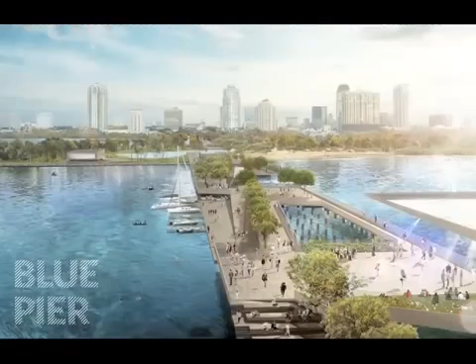It's really all about how do we craft a new relationship between your city and the bay that you sit on. Blue Pier is really a weaving together of the city and the bay, bringing it closer to the city, bringing all those experiences right into your downtown. And we think we came to this idea from building on your legacy, how we've learned from your own history, your values and what's important to you.

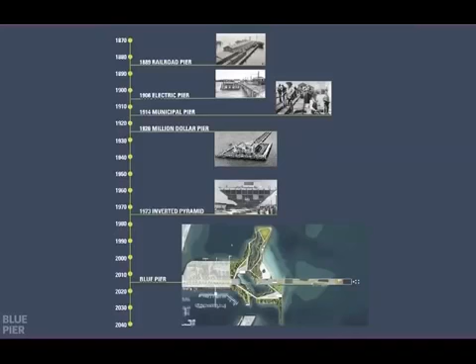We started looking at all the piers, because we were doing the pier project, and found that actually there's been a lot of piers. They've changed over time, even changed location, changed use - they've had railroads, boats, then became pleasure-oriented. The $1 Million Pier, the Inverted Pyramid - it's interesting how they've renewed each other over time, until we are where we are today, again thinking about renewing the pier.

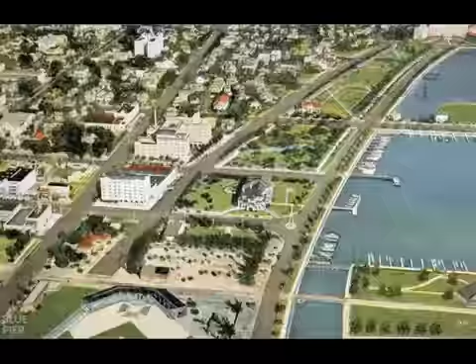On the other hand, in looking at your history, we found something really profound that has guided your development as a city for over 100 years, and it hasn't changed - this is the legacy of your Emerald Necklace, your parks. People around the world know that you did this, that you made that critical choice early in the 1900s that so affected how your city developed. So it's in the spirit of this kind of civic landscape that we've approached the new Blue Pier project.

We've also looked at some of your iconic images - this one's even in the Vinoy. And we noticed that actually the upland is in the foreground, that the upland is what people are enjoying in these pictures. We've also noticed they're enjoying being in the water. The pier's sort of a background element, a beautiful one, and it should continue to be an important part of the whole experience, but it's important not to overemphasize its importance in relation to these other things shown in your own history.

The other thing you've done, which no other county has done on Tampa Bay, is make the aquatic preserve for your county. To me that shows how interested you are in being stewards of your landscape. It's a beautiful landscape - this is what the whole place used to look like. Besides being a great terrestrial and aquatic habitat, it's also a great place for people - people love coming there, posting their pictures.

It's this kind of thing. If it were even closer to your downtown, what a wonderful thing it would be. We've noticed that you've been noticed for this stewardship. You've attracted the Blue Ocean Film Festival and Conservation Summit. This kind of thing will continue to happen as you continue on your path to improving your city and making it a more sustainable place.

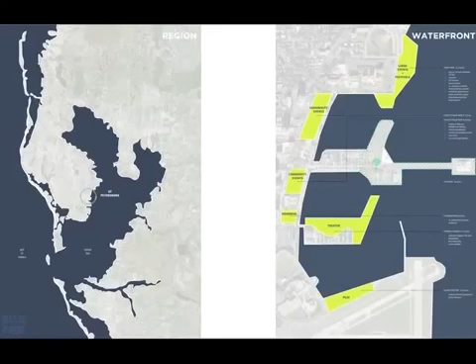So our project is, we want to have a discussion with you about your place on the Tampa Bay and your legacy of these green spaces all about the waterfront, and how we can really make a financially sustainable and ecologically sustainable and fun place on the pier for everyone to enjoy.

So I'm going to try to answer that, or try to begin the conversation. We want to bring the bay and the pier experience closer to the downtown. Right now it's really hard to get all the way out to the end of the pier.

We want that experience to be punctuated by lots of things to do. We know from New York that when there's stuff happening on the street, you don't feel like you're walking as far. You have this along your Beach Drive as well—people promenade along Beach Drive, and that's not an unpleasant experience.

So walking up the pier can be a pleasant one, and it can combine with the lagoon experience, bringing the bay even closer to the downtown.

This experience is composed of 2 things chiefly: the lagoons and the pier. The lagoons are an organic, sinuous landscape of land and water carved into your existing uplands. And the pier, in contrast, is a very crisp, architectural, light structure—a different experience.

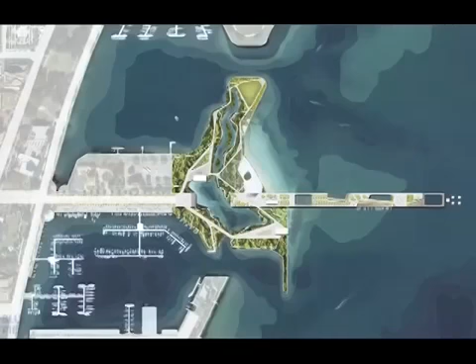When you combine these 2 together, you're really getting a big variety of kinds of places for people to inhabit. We also want to emphasize that our whole project fits within the existing footprint of your land mass and pier, so we're not doing anything outside of that that would cause permitting problems. We're not covering any new water.

This is the plan in more detail, and I'm going to tell you a little bit about how we came up with it, and then take you on a walk around it.

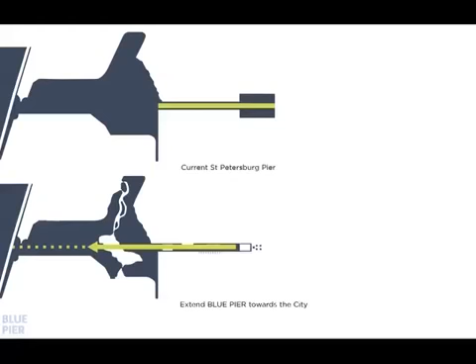So I mentioned the pier is pretty long right now, and it's hard to get all the way out there—a little bit of a joke there. We did make it longer, but we made it longer by shifting it back towards the downtown, so the extension of the pier actually reaches further, closer to the downtown. Here's the existing one: we shoved it back, left this out here for fishing, and then took that length and extended it. So the pier actually starts right here, which is that much closer to the downtown than where it is today. That's the beginning of our experience.

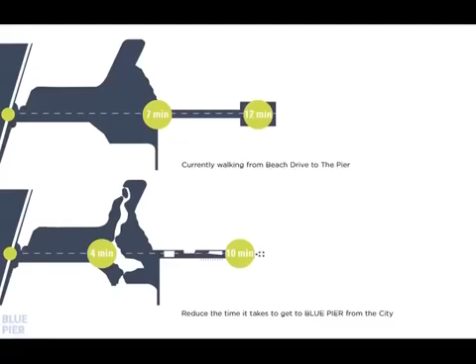So, 4 minutes instead of 7, or 10 minutes to the end instead of 12. This may not sound like a lot, but it actually helps pull people along, gets them engaged earlier in the experience, and once they get engaged, we give them more things to do so they'll keep going.

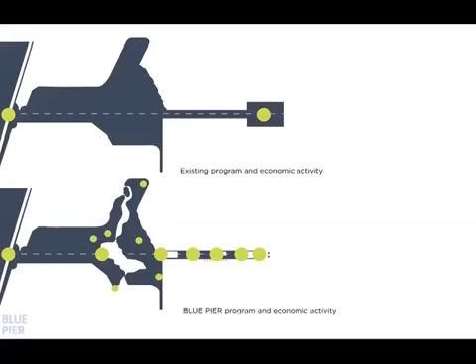So we have this series of events that move along the pier, but also move around the uplands. There you have many choices, many kinds of things, for all kinds of people—it's not one big thing at the end.

To give you an idea of what kinds of things I'm talking about: it's a spray pad for kids and their parents or grandparents, it's a place with a big lawn where you can fly kites or have games, and shaded areas where you can watch what's going on.

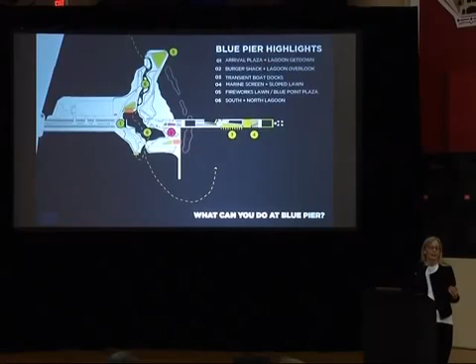And then there's also a whole marine discovery experience, which is the lagoons themselves—the lagoon get-down. We're making artificial reefs where we've carved away parts of the pier to allow more light down. We also have more seagrass that you can watch. So it's a whole experience, and we have the marine screen at the end, which you might have seen—you'll see more in our diagrams—which is a way of seeing underwater, so you can see what's actually happening when you're on the pier, what's happening under your feet.

So that's the marine discovery experience. Right in the middle, the pink thing in this diagram is the burger shack or cafe, where it's going to be the hub of activity. When you get tired moving in any of these directions, up to the lagoons or out here, you can always come back to this central location and cool off in the air conditioning, get something to drink, go up on the roof, have a cocktail, look out over the sunset, just sit with your kids, or take them to the bathroom if that's what they need. So it's really a hub for everyone right there in the middle.

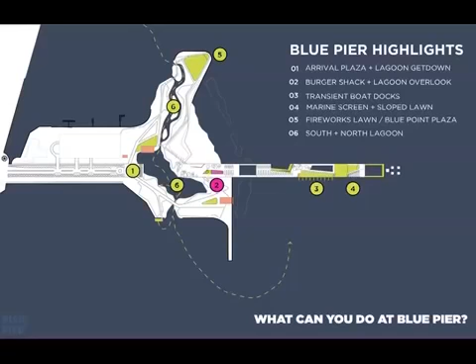This also shows, in the lighter coral color, two other opportunities which James will talk about later, and actually a few other smaller ones, for things that could happen in the future which are not in the budget. But everything else I've been talking about is totally in our budget.

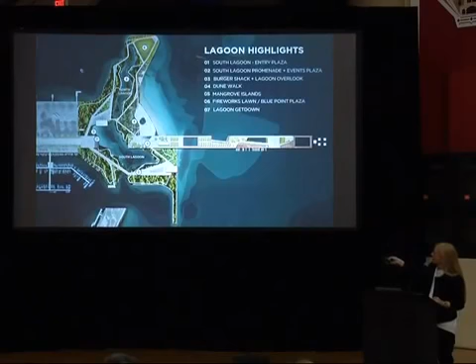So I'm going to walk you around now the two parts of the plan: the lagoons. There's two of them. The South Lagoon is the bigger one, the North Lagoon is the smaller, more linear one. You might notice on the South Lagoon there are 4 big plaza areas that are flexible spaces. Let me point them out again: right here where you enter down 2nd Avenue, right here, and right here. So basically, not really the corners, but spaced around the lagoon, connected by pathways, are these 4 plazas that are event places that can be used and adopted by the community in whatever ways you see fit.

The North Lagoon is different. It's more intimate in scale, and at the end we have a fireworks lawn, sort of a highlight. Once you come through by the beach and through the mangroves, you can arrive at the fireworks lawn and then make your way back through a nature walk to the other side and end up in the Blue Point Plaza.

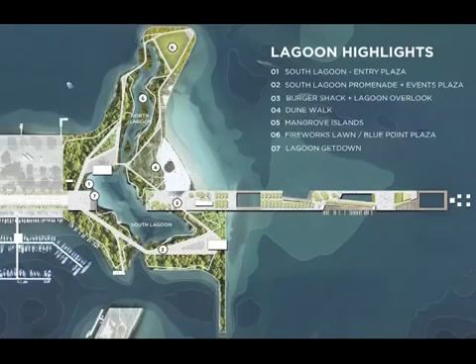We have both an intimate experience and the more urban, larger experience of the 2 lagoons. So now we're going to walk around, starting with the South Lagoon. We're right to the side of the entry plaza. You see a photographer enjoying the scenery, a novice kayaker out in the safety of the lagoon, children on the lagoon getting down, looking for different wildlife in the water.

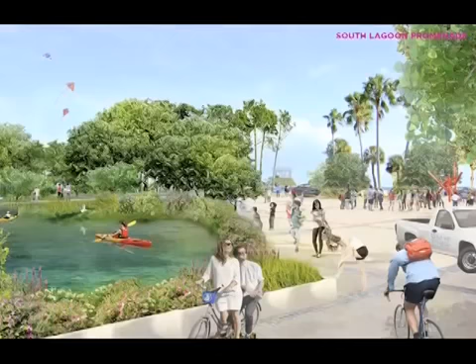We continue around, and this is a larger, more open area — one of the plazas. This loop is open to vehicles as well as pedestrians and bicycles, and it can be programmed for art, for festivals, for food trucks, any number of things. In the distance, just so you understand which way we're looking, out towards the water, is the end of the pier, our iconic sloped lawn and marine screen.

Now, there is an option we talk about, not in the budget, for a future public-private partnership, which would bring a large scale event pavilion and restaurant to this location on this plaza. James will talk a little bit more about that, but we're really here to focus on what's in the project.

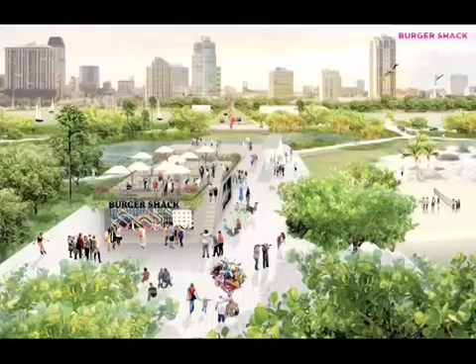So this is in the project, this is that central hub. We've now moved around the lagoon another quarter, and we're calling it the Burger Shack. It could be your fish shack, it could be whatever you all want it to be, but we see it as a place where you could pick up, on this side facing us, just some kind of fast food at the counter. Under here is the air-conditioned part inside, a place to sit under this canopy, and then the roof, which is also available for a little bit more of a view. So that 3,600 square foot restaurant is in our project, and there's also public restrooms.

Then we continue around the lagoons to Spa Beach. We've added some dunes to make them a little more resilient. We're building the landscape up anyway because we need to get out of the floodplain for the building I was just talking about. When we're excavating for the lagoons, we're using it to fill, and we're also making some of these dunes around the beach to make it more resilient.

Now we're up in the northern lagoon, which will probably include a mangrove area. This is a place where you can really get up close and personal with nature, kayak right through it, really explore for those people that want to do this sort of thing. Or there are the pathways, just to the right and left, a little higher above the water, where you can also see the birds and explore nature in that way.

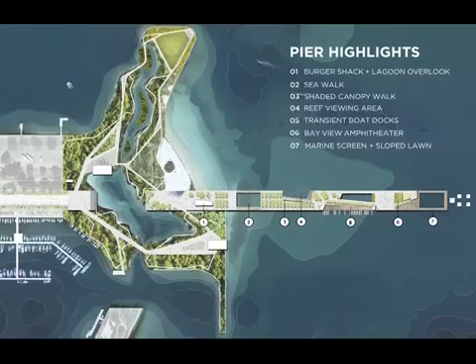The other thing I want to point out about the pier before we get started on our walk is that we've cut a lot of holes in it. It's about the same 100 feet wide at the wide points, but we've carved out large areas for various activities, fishing here at the end. We've tripled the amount of fishing space, and some of the other ones are for reef viewing and other things I'll talk about as we move on. This both makes the pier smaller and more affordable, but it also makes it more exciting, not as linear, with lots of different kinds of spaces and things to do.

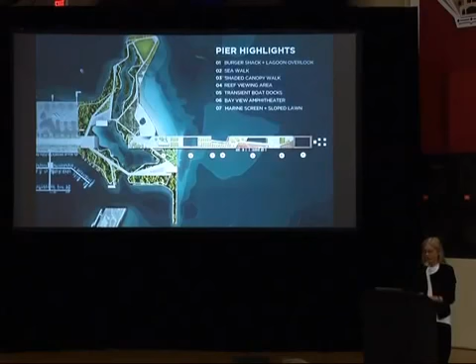So let's again start at the Burger Shack, which is on the pier, and we're going to move behind the way we're looking, out to the water instead of into the city, as you see in this picture.

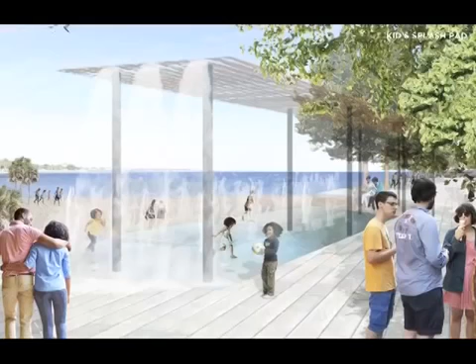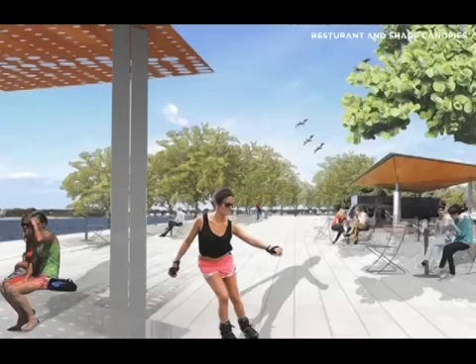Right around the Burger Shack, there's the splash pad that kids can play in, a shaded area for people to watch the kids and also for the kids themselves, so they're not always out in the sun. Then, walking on towards the Burger Shack, there's the shaded area where you can sit, people hanging out and sitting under the trees, sitting under the canopy, watching other people.

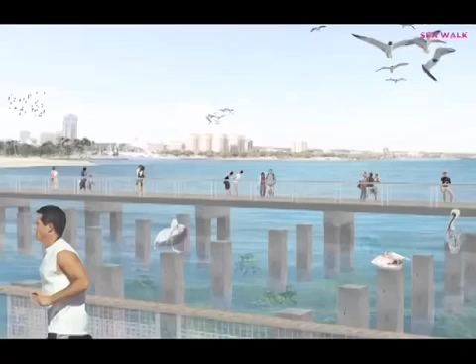After we leave that area, we go out over the water. This is kind of the gateway, the sea walk. And you can really tell you're headed out over the water in this drawing.

The other thing this does is we're leaving the old piles that supported the original pier, and we're adding some reef pieces to that so that we're attracting more animals to this area. It's also at the height right in the seagrass band, where you have seagrass everywhere else, but you didn't have it here because it was all dark under the pier. By letting the light in, the seagrass will colonize this area, so it'll be a great place as you take the sea walk to

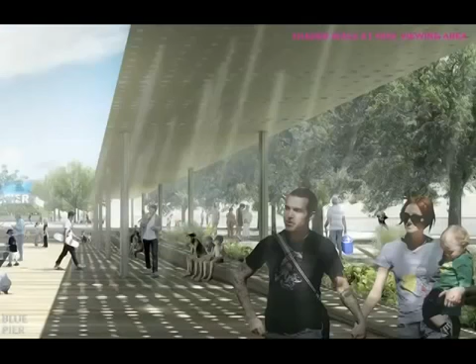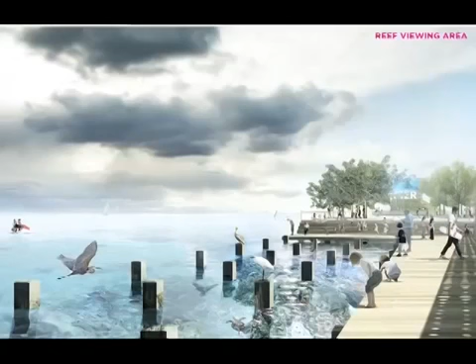see what's happening there, and also if you take your jog along in the morning or in the evening. Continuing on, it's a shaded place where people can sit and just enjoy being out on the pier. It's a place where you can watch the animals reef viewing, as I've already said.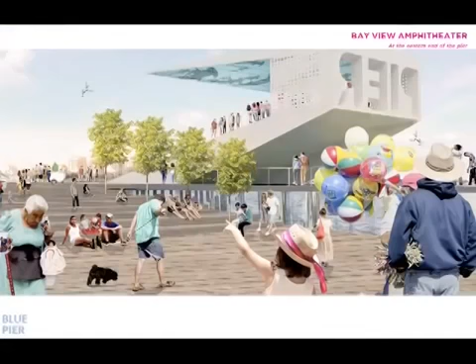And we have transient boat docks in our budget, and this is a place where you also might be able to pick up a kayak and take it out for a spin.

At the very end of the pier, it splits. The reason for this is we want you to both be able to look out at the bay, so those are the steps right in front of us coming down, the bay is behind us, or we want you to be able to look back at the city, which is the one you see here, which we're calling the sloped lawn and marine screen.

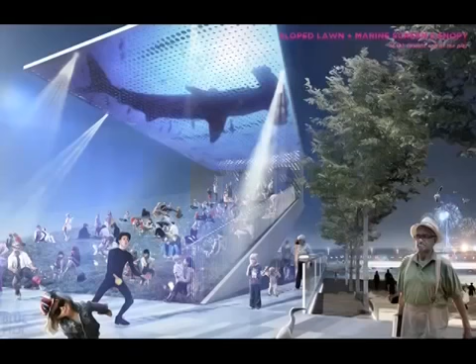So these two moves, looking out at the bay this way, or back at the city, create two iconic meeting places for people at the end with very different kinds of atmospheres. The marine screen is also a place where you can watch what's happening underwater, or in the evening, you might see a movie, see some music, watch a little performance, or just create a performance yourself with a bunch of your friends.

So I believe I've covered all the things that we've tried to incorporate, which were the Pier working group options as a part of our scheme.

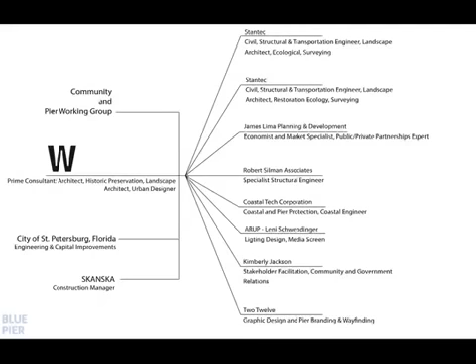This is probably the most boring slide of the presentation, but perhaps one of the more important slides. It's who are you going to be working with in the city of St. Petersburg to get this done. We put together what we think is the best national team and local team of engineers, artists, graphic designers, economists, and wayfinding consultants and community participation consultants to work with the Pier working group, the community, and the city, and also to work with the city of St. Petersburg and Skanska, who we've also already put in a lot of time with.

So who is that team? Stantec is our engineering consultant working on such things as civil, structural, restoration ecology, transportation, and surveying. Stantec, if you don't know, is one of the largest engineering firms in the world with over 15,000 people. They're an incredible firm that focuses a lot on sustainable planning and sustainable infrastructure.

We're really proud to have them on the team, who's done projects such as this at Robinson Preserve, which is something like 29 acres of restoration ecology of mangroves and lagoons and things, just like we're doing here.

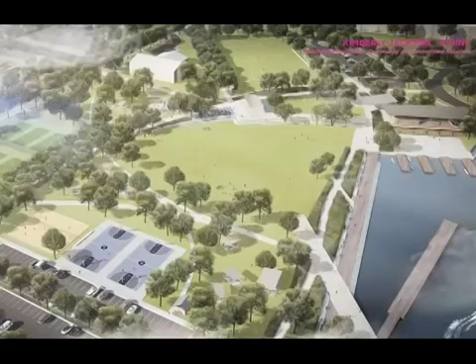A good waterfront project needs to be resilient, and it needs to have a great marine and coastal engineer. And Coastal Tech Corporation, we think, is one of the best marine engineering firms and coastal marine engineering firms in South Florida, doing projects like the Pelican Reserve here.

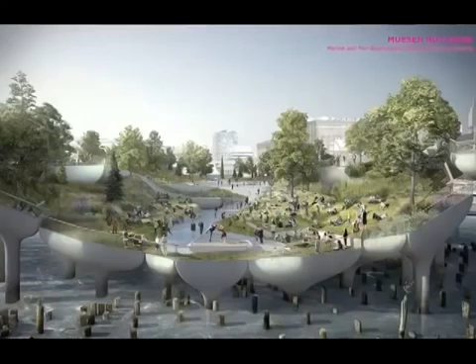W Architecture knows, because we work on a lot of public space projects and municipal projects, that we need a great community and government relations consultant. So Kimberly Jackson is here. She's helping us, hopefully when we get this project, to start working with the city to craft a really good stakeholder engagement process. And that's what we're used to doing around the world and around the country. We're really excited to do it here, because that's really when the project starts. We're just giving you a vision, and we really want to work with the city.

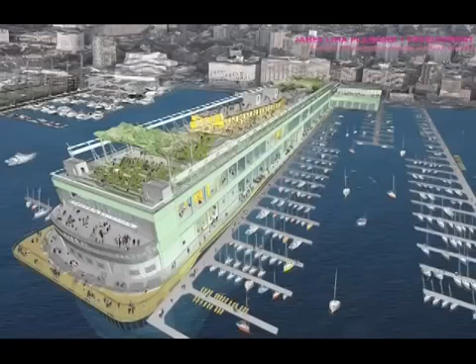Piers are really complex structures. Piers need incredible engineers. Mueser Rutledge, some of you might know, is probably the most talented geotechnical and marine engineer in the country focusing on piers. They're working on a number of large iconic piers in New York and along the eastern seaboard, such as the Thomas Heatherwick Pier here being built in the Hudson River in New York. Incredibly complex structures, incredibly complex engineers. Roderick Ellman, the principal there, has over 35 years building these kinds of piers.

James Lima is an exciting consultant for us. James Lima, Planning and Development. He's our economist, market specialist, and the reason why we brought him on this project particularly is for public-private partnerships, to craft the right economic environment to leverage the private sector to create some of these amenities on the site, which he'll talk more further about.

James is involved in some of the most exciting projects in North America in terms of urban development and public space, like Pier 57 in New York, and also the Governor's Island project in New York, one of the largest park and public space projects in the country right now.

For structural engineering, we chose Robert Silman because we like working with them. We've worked with them on over a dozen projects. We're working with them on creating structures that are efficient and sustainable and pleasing. Robert Silman has already put in a lot of time on some of the structures that Barbara showed you, like the marine screen and the sloped canopy and sloped lawn. They're incredibly efficient engineers, and they're really great to work with.

Probably the most important consultant I'm going to present you with is Gardiner & Theobald in terms of cost consulting. Gardiner & Theobald has already put in a lot of time with us, getting this project under budget. And they're working on, I think, some of the largest projects in the country in terms of public space.

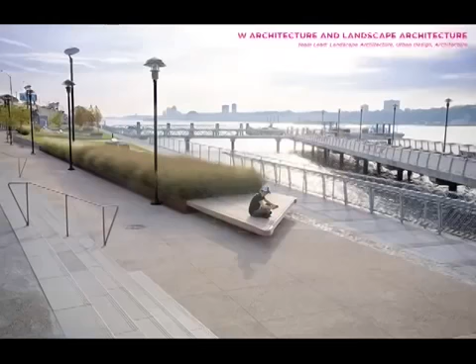And finally, W Architecture, that's us. We are landscape architects, urban designers, and architects. Barbara is one of the very few people in the country who's a fellow of both AIA and ASLA. We're a woman-owned firm, and we focus primarily on waterfront public spaces. We've done over 50 waterfront projects and piers around the world.

We do these projects in a way that creates spaces that are flexible. We know that successful public spaces are adaptable and flexible. They're great for big crowds, and they're great for someone like this guy on this platform here. They need to be intimate and romantic, but also able to accommodate large crowds.

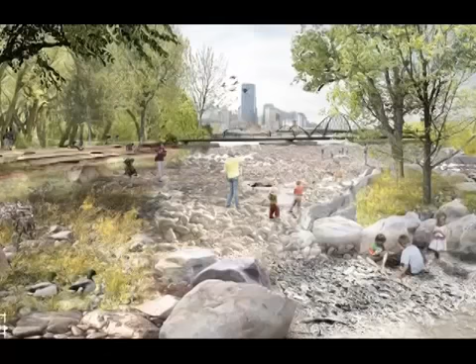Like our project here on the Brooklyn waterfront. This is one of the first projects built on the Williamsburg waterfront in the new redevelopment there. Real estate in this area has increased by something like 250% since this project was implemented, for a number of reasons: because the waterfront is turning green, but also because it has spaces that can accommodate a young demographic, an old demographic, families, and that can become different over time and adaptable. We're working a lot on creating new environments and working with the ecology to create better places for people to get down to the water.

Everyone loves water. It's such a great thing to have in cities. It's a tremendous gift you have here. It's something that Calgary also has. So this project is in Calgary, currently under construction.

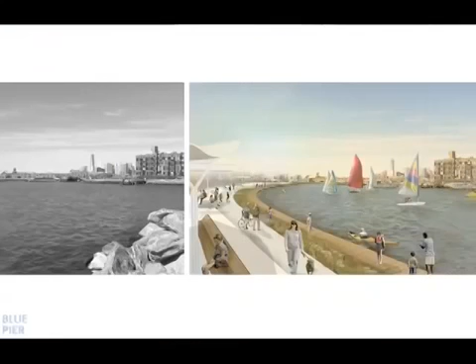We show this image because we're doing something very similar in Calgary by opening up a new channel in an existing island that's 40 acres. It's the largest public space project in Calgary, and it's about getting people down to the water, connecting the river on both sides of this island. We've navigated the permitting processes in Canada, and we're building this. It will be open in August.

We're now working on a lot of resiliency projects. Resiliency has become kind of a buzzword since Hurricane Sandy and the storms that have wreaked havoc on the eastern seaboard. We're now working with a lot of consultants to create places that are economically, environmentally, and socially sustainable and resilient. So we're working on a lot of these big projects on the eastern seaboard now.

A lot of what Blue Pier is about is marine discovery. The entire place is a marine discovery center, which is important to understand. At the end of the pier, where we're talking about marine discovery, it's the largest point, or elevation, which we're raising 4 to 6 feet at the very end. And we're having this marine discovery center within what Barbara described as the marine screen, which is on the bottom.

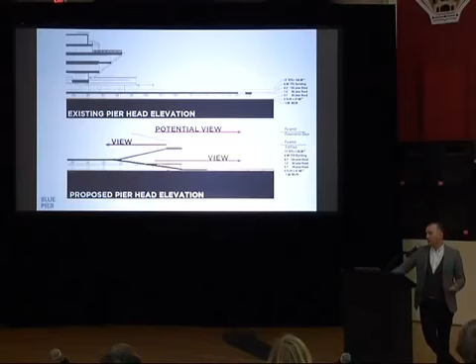So I'm showing the existing elevation versus the new elevation. This is about views of the bay, and also about seeing what's on that marine screen and about water clarity. In Middle Tampa Bay, we found that the water clarity is actually about 8 to 10 feet on average. That's about the depth that seagrass grows, and the depth that lots of waterborne creatures like to have. So that's exactly the depth that will be in the lagoons, and the depth we'll probably be projecting some of these images from.

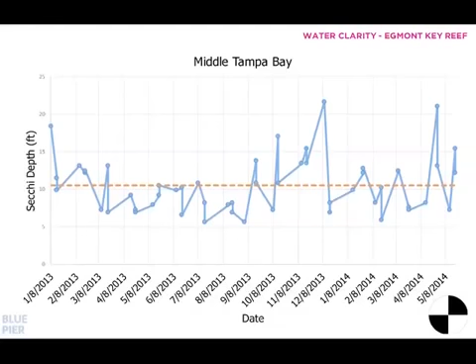We have a little water clarity video here, this is the Tampa Bay Artificial Reef Group, taken from Middle Tampa Bay. I think this is a group of flounder. As you can see, it's a quite clear environment, and there's a lot happening. It's exciting.

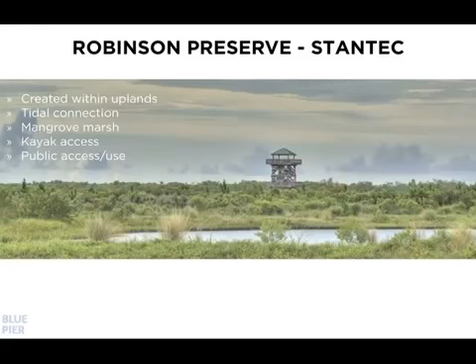And this is completely buildable. The Marine Discovery Center, the lagoons that we're talking about, it's created within the uplands. There's a tidal connection, much like the project that Stantec worked on at Robinson Preserve. So we think this is entirely buildable, and it's really a great public benefit because there's public access and use.

As Randy Runnels, the aquatic preserve manager for the county, said, all it takes is a look underwater to understand why these two aquatic preserves are located in Florida's most densely urbanized county. The abundant, diverse aquatic resources must have been a key attraction to early settlers, and we think it's going to be a key attraction to residents and tourists alike here at Blue Pier.

We want to work with potential partnerships. We've identified a number of groups, organizations, and institutions in South Florida that are working on marine environments that the city could perhaps work with on this marine project we're presenting.

The project is permittable. As Barbara briefly described, this is the existing site at the pier, and this is Blue Pier. Everything exists within the footprint of the land, so we're excavating lagoons within a filled environment. This is all filled land out there, so we're just uncovering what was there naturally.

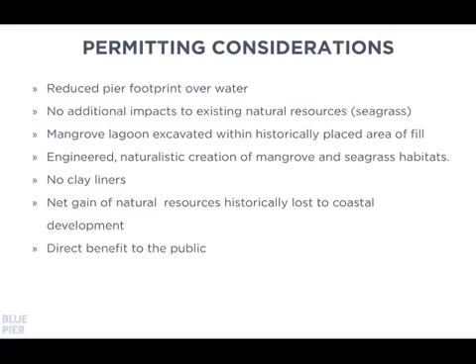I won't go through all of the permitting considerations—we can talk about them if you have questions—but some things we should really think about: we're reducing the pier footprint over water, which is great, with no additional impacts to natural resources. We're actually increasing seagrass development by three times. There are no clay liners; this is a totally natural lagoon we're creating. There's a net gain of natural resources, historically lost to coastal development, so restoration of the uplands is really intended and expected to improve water quality here.

Because you have parking lots and grass, and grass is essentially an ecological desert, all it provides really is chemicals to the water and sediments. So it creates an environment with poorer water quality because of the runoff. By creating lagoons and things, we're able to filter the stormwater runoff before it gets into the bay.

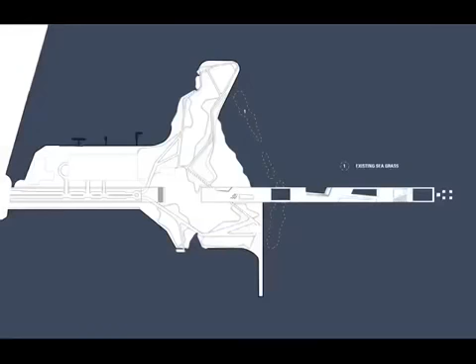This is the existing seagrass diagram, as Barbara quickly explained. The seagrass is here. In the existing pier—we're showing the proposed, but in the existing pier this is all solid—so there's no seagrass underneath because of the sunlight. In the next diagram, we see that we increase the seagrass by three times because it will grow in this now-lighted area with sunlight, and it will grow in the lagoons as well.

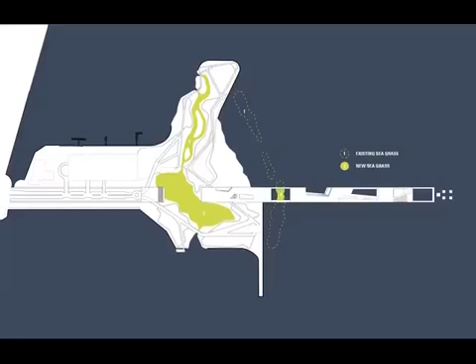This is just an example of the diverse ecologies we're presenting and going to be creating here. Blue Pier lagoons will be 90% flushed within 2 to 3 days. The Army Corps of Engineers allows 4 days. This is a very preliminary study—we think it's accurate, and we're looking forward to the permitting process where we can study this further.

This is the tidal fluctuations of Tampa Bay. As you see over a 24-hour period, the tides are coming in and out, so the flushing study will in many ways be adapted to how the tides are working in this area.

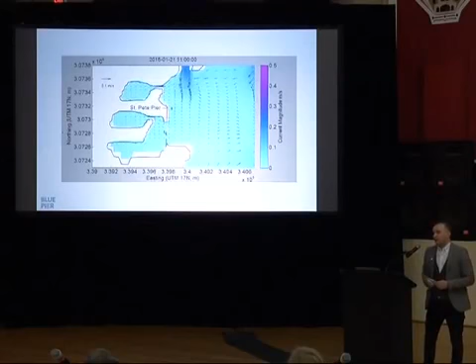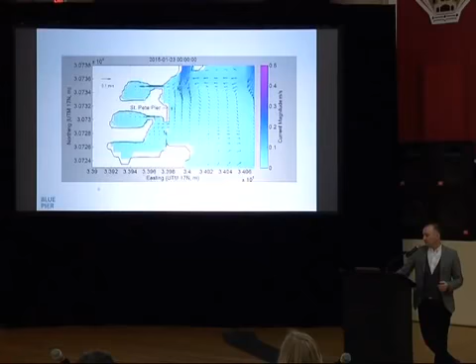Okay, so the project is on budget. Everything we showed you, with the exception of those peach-colored buildings, which James will talk further about, is $32.9 million. What's interesting and exciting about this for us is that we've provided a lot of really interesting and diverse experiences that can build on the great civic legacy you've already started with improving the waterfront landscape, which then drives income and real estate values downtown. So all these experiences for $32.9 million is quite great.

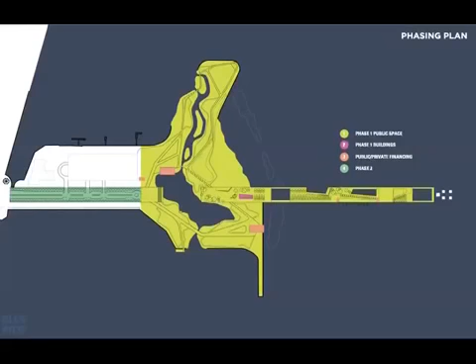In terms of phasing, everything we showed you in the green area is all public space built in phase one. The pink building, which Barbara described as the burger shack or the lobster shack, could also be built in phase one. The other buildings James will talk about are in peach—these are public-private opportunities either built subsequently or after the fact.

As for schedule, we don't have to talk a lot about it, but what we're thinking is about a year of design and permitting and about 18 months of construction. We think the permitting and design can happen concurrently so we're ready to start construction, with bidding sometime in July 2016, and hopefully opening this park in summer 2018.

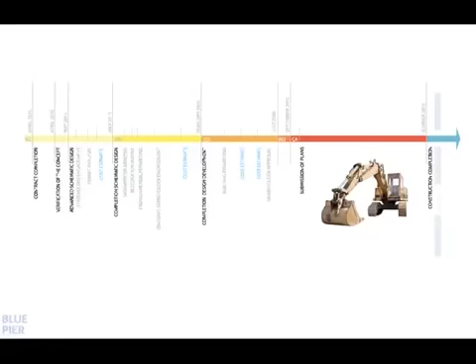And now James Lima is going to talk about return on investment and how we're going to market this place.

Thanks, Marty. Good afternoon, I'm sorry I don't have any videos. I want to talk about positive return on investment. Positive ROI refers to the direct and indirect economic returns to the city of its patient upfront capital investment in placemaking. It also refers to how Blue Pier will reinforce and enhance St. Petersburg's already impressive position as a city of choice in which to live, to work, to visit, and to play.

It refers to getting you also the most quality public space for your money. We think we've done a really terrific job creating diversely programmed and usable space that also happens to generate significant revenue to pay for the operations and maintenance of the park, in a way the city hasn't been able to rely upon in the past.

Our team prides itself on helping our public sector clients succeed in executing vision plans for great new urban spaces around the country that meet local community needs and are grounded in market reality.

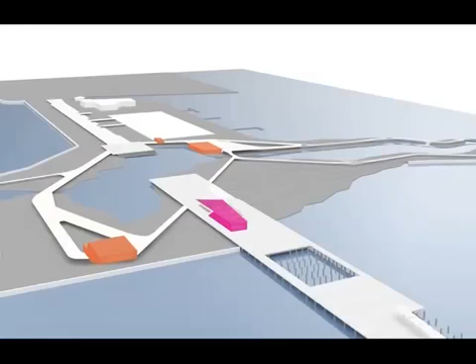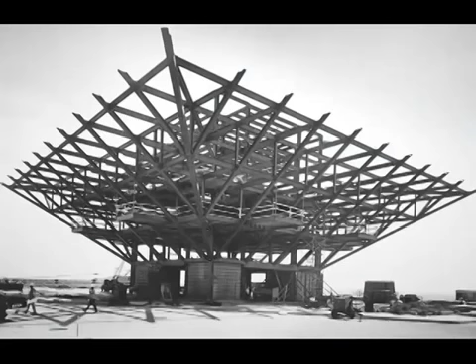We thought hard about where the revenue generators to support the park, and the programming activation, would be the way that the local community, particularly downtown workers and local residents, would be most likely to return again and again to use the pier as part of their daily life in the city. We're intrigued with the challenge of repurposing the existing inverted pyramid and bridge structure.

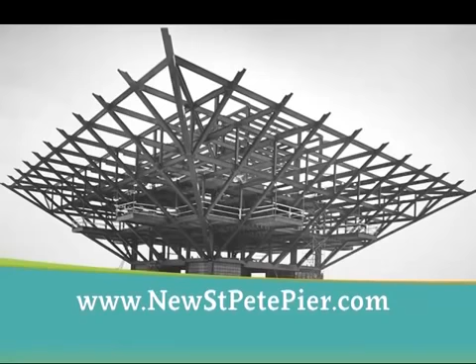Some have compared your pier to the Chicago Navy Pier. But it's worth reminding ourselves that St. Pete has a population of roughly 250,000, whereas Chicago is more than 10 times that. So how can a configuration of a very long pier, essentially an object separate from the daily life of your downtown, be a sustainably maintained economic and social hub for your city?

We saw images yesterday of the demolition of the Million Dollar Pier in 1967, a beautiful structure. And of course, in 2011, the city was prepared to demolish the inverted pyramid, which reinforces our team's belief that the fundamental problem of the inverted pyramid is not an architectural one. It's an economic and programming problem.

I work a lot around the country with urban waterfronts, and waterfront retail is a very tricky business. If you draw a circle, a radius around your waterfront retail site, essentially half of your market is fish. So unlike most places where retail goes, you've lost half your potential customer base. And yet we're so enamored and seduced by waterfronts that we've got to figure out ways to create civic places and really active uses of them.

So the challenge for us was how do we continue the rich tradition of a civic landscape and a civic bayfront, but also find ways to make it more economically enduring, to be a continuum for the downtown and to pay for itself to a greater extent than it does today.

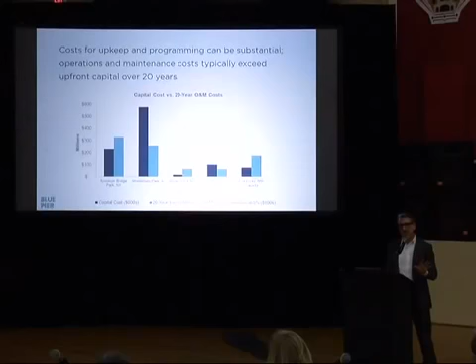So we're really happy that our scheme to begin with is the lowest in terms of projected operating costs, but we're also being very careful to integrate, in ways that are both additive to the public park experience but also really sensitively integrated in terms of the way they look and feel, earned income opportunities.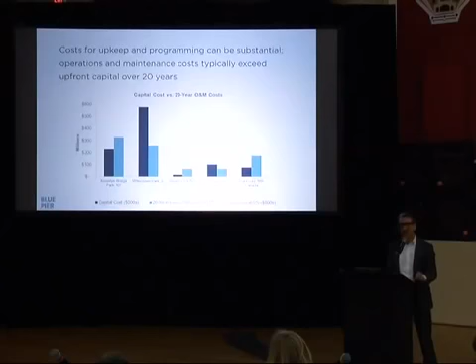That generally falls into two categories. One is concessions revenues that meet the needs people want. People want to have a perch, an urban perch, to sit and have a drink, have a meal, get together with friends. We've heard that for the last two days.

We also know that you are becoming an increasingly important place for events. That film festival is just one example. There are many, many ways to leverage the value of that and all the other good things happening in your downtown. How can your infrastructure and your marketing and the places that get created at your central waterfront help you not only generate revenue, but capture it and redirect it back to public benefits.

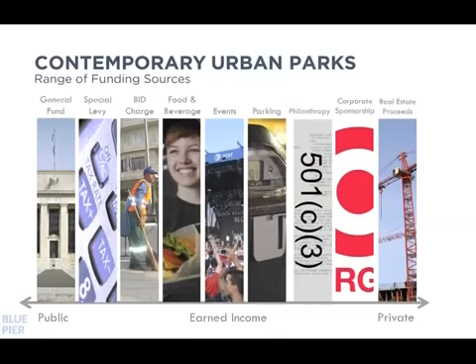Which means operation and revenue sources of funding for your park. So we'll look at the whole range of strategies of public funding, special levies, your TIF district, food and beverage revenue, special events, philanthropy, corporate sponsorship, and the like. Again, the focus for us was on two things: concessions revenues and special events programming.

I'm going to talk a little bit about future potential phases for concessions revenues as well. In all cases, it's critical that any concessions be the highest quality. They have to represent and signal the character and quality of the park experience and the pier experience, but also really express your values of it being a civic place.

For the similar project I'm working on for the Minneapolis Parks Foundation, we talked to all the best food purveyors in Minneapolis, which has an incredible food culture, and tried to get them really interested in the idea of operating the pavilion in this new park, and that has been incredibly fruitful. So we can work with you not only on planning for the right places for these kinds of things to exist, to add to the park, but to really understand, on the private operator side, what they want, what they need, and how to set the table for the most favorable private market response when you're ready.

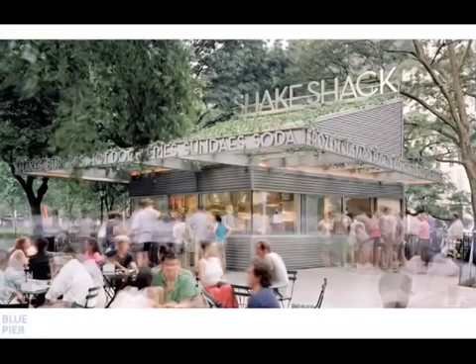Cities around the country where I'm working, everyone wants a Shake Shack. It started in New York, but they're now all over the country. They just issued an IPO. It's high quality fast food that makes people happy. It's burgers, it's incredible milkshakes. The lines are very long, but people love it. It's joyful, it's communal, it's an experience. It's not just about the food, it's an experience.

So you could have a local version of that, something really authentic, but we think a pavilion that just fits into a beautiful park landscape that provides amenities. In our case, it's situated at that lagoon plaza, this hub of activity.

Again, if you're 4 minutes away from downtown and you say, hey, I've got my lunch break, would I go there? Yeah, I'd go there. Would I go all the way out to the end of the pier? I don't think I have time at lunchtime to do that, but I like the idea of it. After work, you don't have a lot of time, you'll go there. How can we program this so that family-friendly activities at Spa Beach, at the lagoons, and at this location create a really important node? So even if you never make it further out on the pier, which we hope everyone always does, you've had an incredible pier experience right here.

We think by this being more relevant to the life of downtown, it will make it more enduring and more likely to be sustainable and also valuable for the park. So it's $250,000 to $400,000 a year in projected revenues to the city, based on comparable projects around the country.

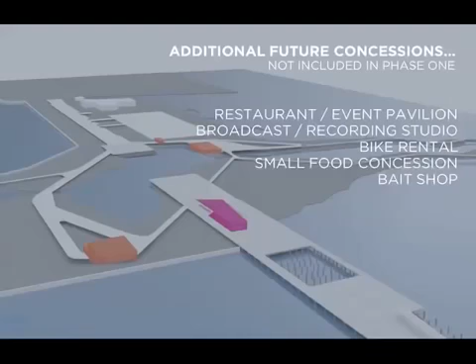And then for additional revenues, again, these orange sites are future sites. So to unlock the value that you're going to create in this spectacular pier and park, I strongly urge that we think about the future marketing of an additional site that would be, maybe in our case, an 8,000 square foot restaurant and event venue.

I mean, who would not want to get married at a beautiful location on the bay, overlooking this lagoon, in walking distance to all these beautiful photo shoot locations? It could go in a variety of places—in the foreground, but it could also go in the background on a site that is very comparable to the Boathouse in Central Park, this beautiful restaurant on a lake where it's constantly booked for weddings and generates enormous revenues.

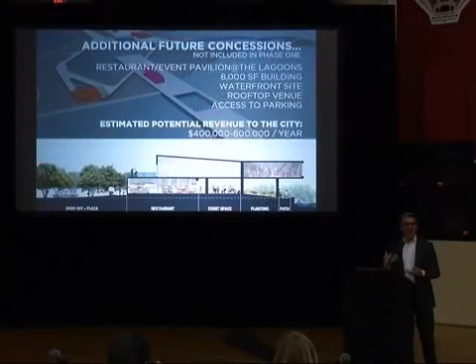The important thing that we're doing here is saying, build a spectacular public place, and then you've set the table, you've created value in the way that the High Line was opened, and by phase 2, every concessionaire wanted in and was willing to pay to get in. So don't negotiate from a position of weakness by doing that early. Build phase 1, prove success, and then negotiate for the big restaurant moment that can generate significant revenue.

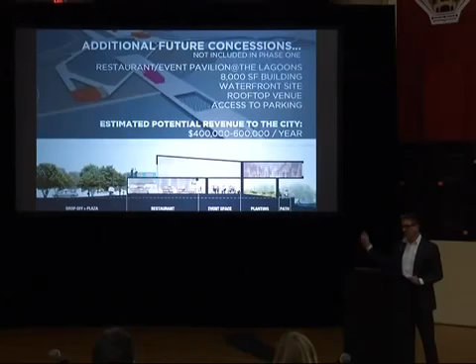You can see we're projecting revenues in phase 2. We have discussed before the idea of a broadcast studio, live from St. Pete. If Jennifer Lopez is selling something on the Home Shopping Network, that should be happening in this park, on the pier, live from St. Pete Pier, and your identity and brand about what's going on here, the vibrancy of the place, the excitement of celebrities coming to your film festivals.

You're really on a world stage. You're sharing a film festival with Monaco, for goodness sake. I mean, it's pretty incredible—the city's really on an upward trajectory in terms of its economic value.

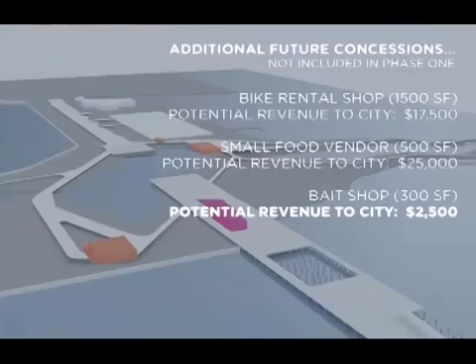We also want to create spaces, though, that are for everybody. So you should be able to come to this pier and not have to spend money, but have a great experience, the family, to come to the splash park, to come to the beach, to have small food vendor options at a right price point. The bait shop is there out on the end of the pier.

And so in total, we see about $500,000 to $650,000 in revenue in the first year against, again, what is the lowest operating cost for all of the schemes. So we think the city's obligation long-term will quickly diminish. Examples of successful parks show that revenues escalate quite quickly in terms of earned income, and for all phases, we're at $1 million to $1.5 million, again, projecting based on comparable projects around the country.

And then just quickly, so a civic icon—what are the ways that the quality of public space, the quality of programming, basically creates an armature for all the creative not-for-profits in the arts, in environmental science, in education. You can come and become the owner of this space. We're just creating the infrastructure. We're creating this great civic landscape, an extension of your great waterfront today.

And you're going to populate it. You're going to figure it out. The city doesn't have to program everything. It's just setting it up in a way that creates ownership so that everyone's thinking about it, and this brand, this identity becomes joyful and becomes part of everyone's daily life here, first and foremost for the people who live here, and then for those who work here and visit. So we really want to emphasize that point that it's about creating that civic landscape where you come together.

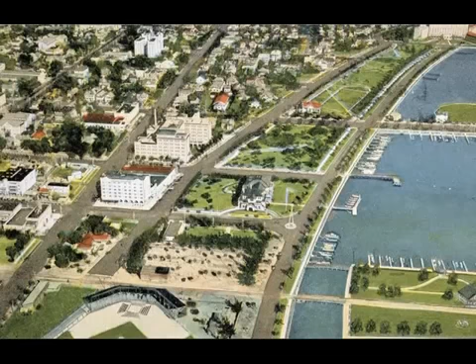I'll just wrap it up, reminding you that we want you to think hard about where your city's going, how it should relate to the Bay, what's its future, how are your values going to be shown in what you build with and for your citizens. And that, as James said, this is a place we're trying to help create that you all can take ownership of. There's many, many places at Blue Pier that can be used for different activities and can change over time. It's your legacy of open space that we want to build on, that we think building on this will take you into the next century.